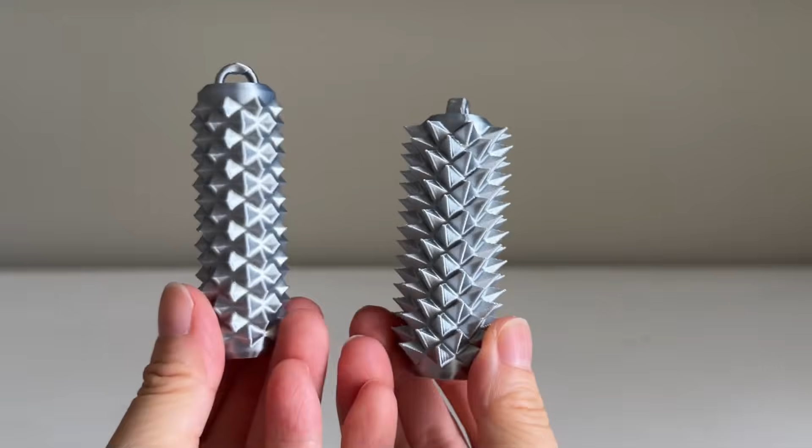At first glance, this might look like something you wouldn't want to touch, but for many people, spiky sensory toys are surprisingly satisfying to play with. Those little spikes create a unique tactile feeling that keeps your hands busy and can be surprisingly relaxing.

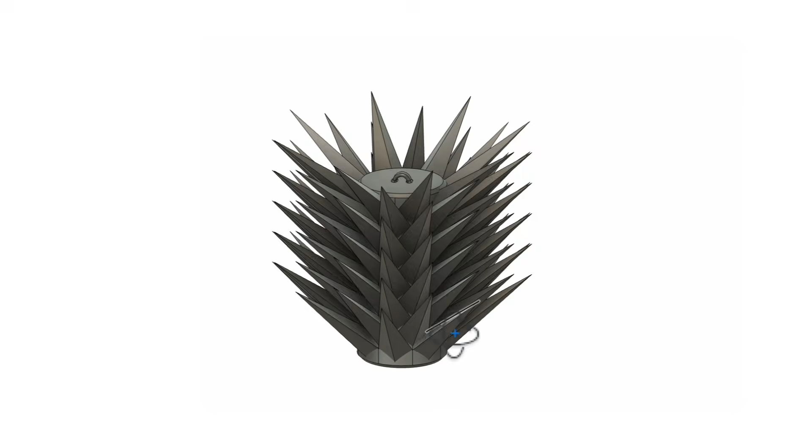It may look complicated, but in Fusion, you can build a spiky sensory toy like this in just a few simple steps and keep the whole thing parametric, including the spike feel. Change one value, and you can go from a low pain version to something much more intense. All right, let's dive right in.

First, let's take a look at the design. Let's start by defining a few key parameters, including the cylinder's diameter and height.

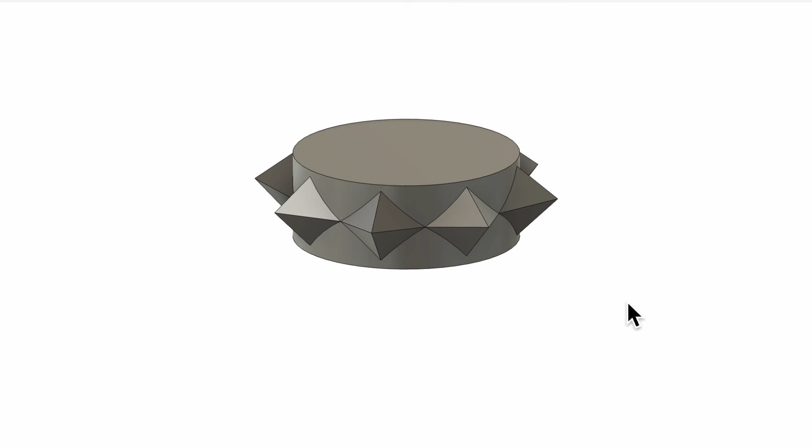You may have noticed that the spikes are arranged in multiple layers. Each layer contains one ring of spikes, and the distance between layers is called the layer height. The whole fidget is built by stacking multiple layers.

We'll start by entering the key dimensions into the parameter table. Think of it as your control panel for the whole model. This will make everything super easy to adjust later. Click the little plus icon to add our first parameter, diameter, and set it to 18 millimeters.

I'll skip ahead here instead of showing every entry one by one. We've defined diameter and height as the cylinder's overall dimensions. We also need a layer count. It's calculated with this formula, which assumes the spike width and height are roughly similar. Finally, we'll calculate the exact layer height by dividing the total height by the number of layers.

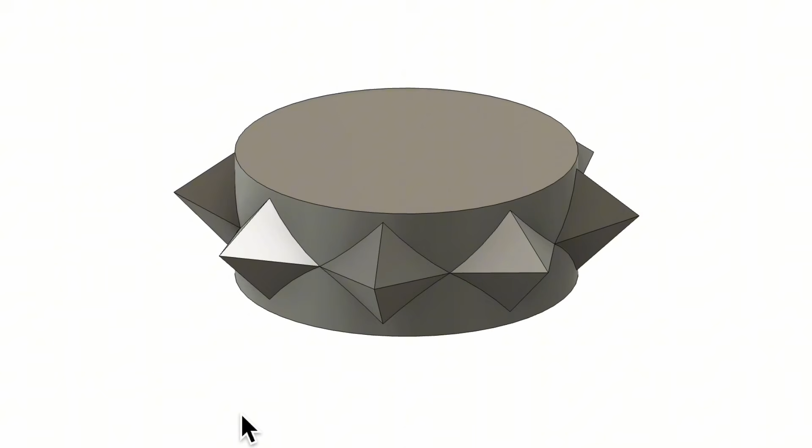Before moving on, let's take a closer look at one layer of spikes. Each layer has 8 spikes. Working directly on a curved surface would be tricky, so I'll build the spikes on an octagonal prism instead. On each side face, I'll create a small quadrilateral and loft it into a spike.

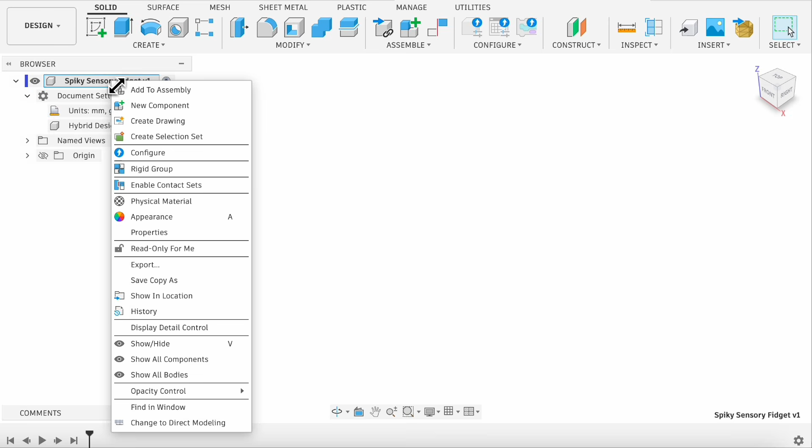All right, let's start modeling. Right-click the root component in the browser and select New Component. Let's name it Spiky Sensory Fidget. I'll start with a sketch on the XY plane.

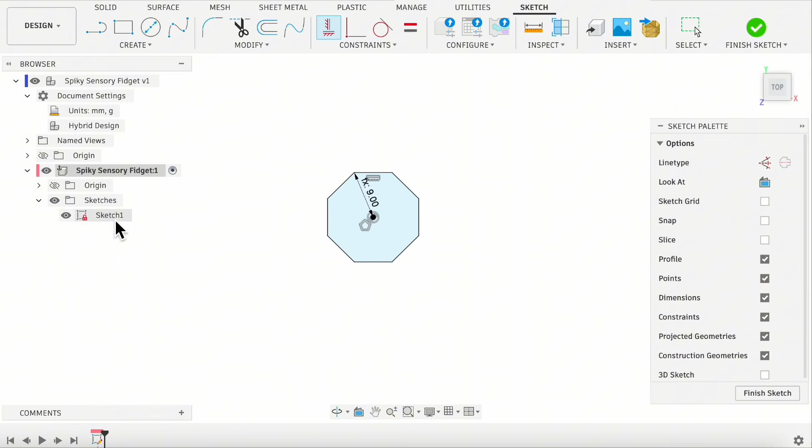Create an inscribed polygon with a radius equal to diameter divided by 2, and set the number of sides to 8. Check if it is fully defined here, the small lock icon. Finish the sketch and rename it to Octagon.

Hit E to extrude. Set the extrusion height to the layer height parameter. This is one unit layer. The full fidget is made up of multiple unit layers.

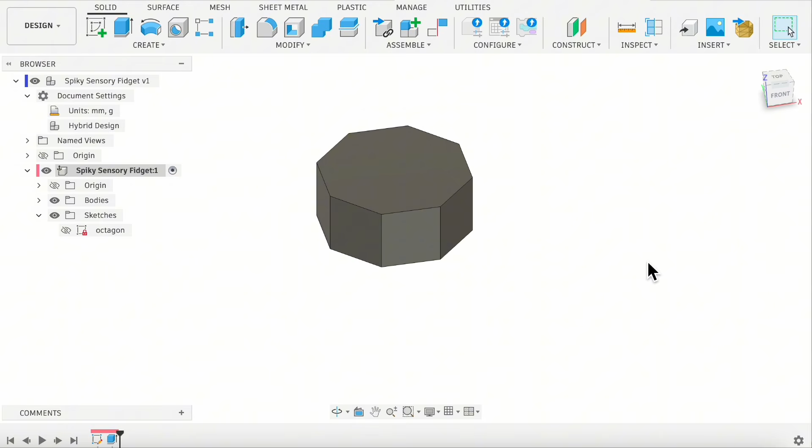Next, we'll model the first spike. Create a new sketch on the XZ plane. Press P to project this face into the sketch. Let's hide the bodies for now. Press L and draw the first spike profile.

From the side, it looks like a triangle. Since the print direction is along the Z axis, we'll set this angle to 45 degrees to avoid a steep overhang.

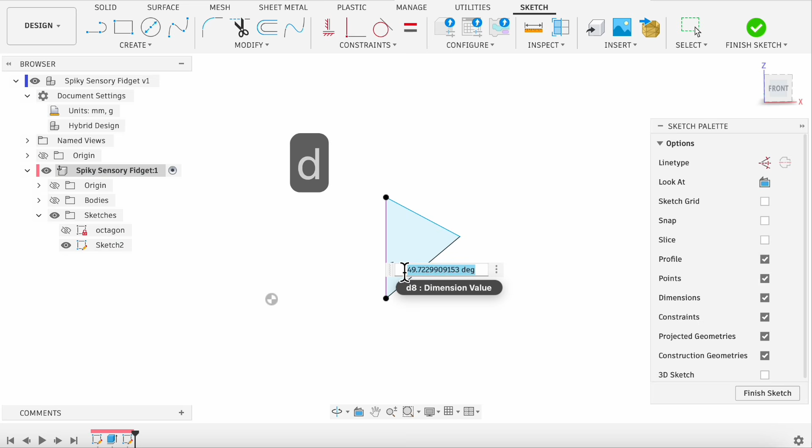Here's the interesting part. The spike height directly controls how this feels. To make that tactile feel parametric, go to the Modify menu and open Change Parameters. Add a new parameter called Spike Height. It controls the spike height and how intense the texture feels. For now, I'll set it to 4 millimeters.

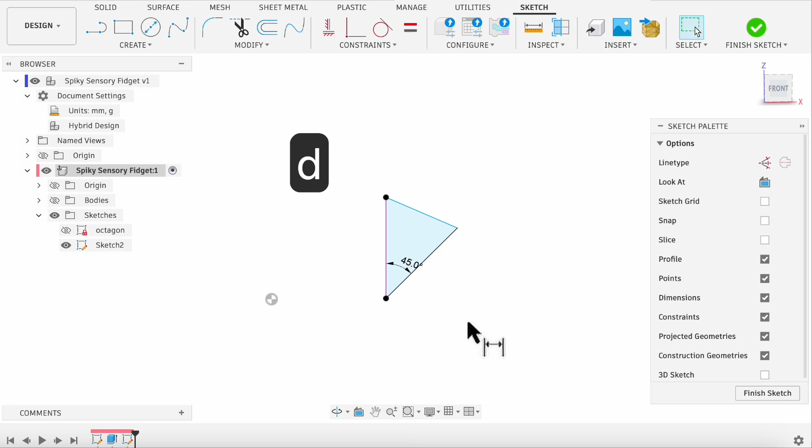Press D and set this height to the spike height parameter we just created. Now everything looks fully defined. Okay, let's finish the sketch and rename it Spike.

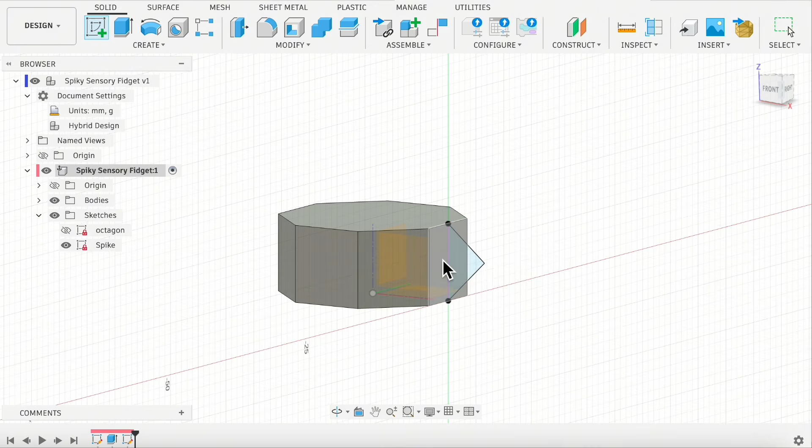Next, let's sketch the base of the spikes. This sketch is created on the side face of the prism, but it only covers part of the face. Create a new sketch on this face. Press L and connect these midpoints. Finish the sketch and rename it Spike Bottom.

Next, go to the Create menu and choose Loft. Loft the quadrilateral on the prism face to the point on the outside. That gives us our first spike.

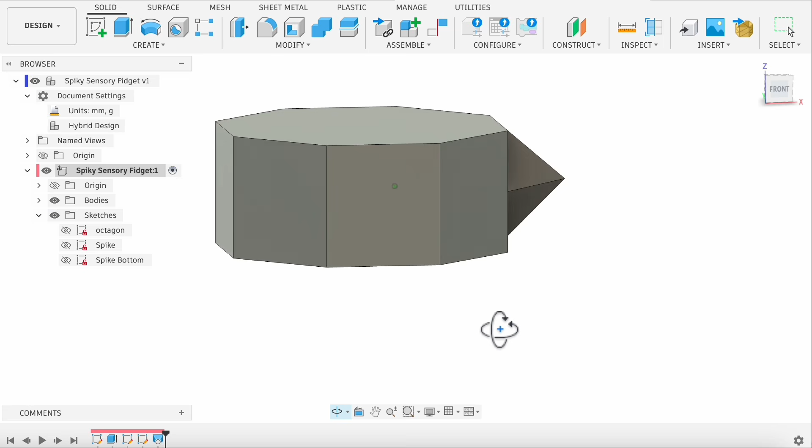Luckily, we don't have to create all 8 spikes one by one. We'll use circular pattern to create a full ring of spikes. For Object, choose Features, select the Loft feature from the timeline, and use the Z axis. Set the quantity to 8. And now we have the first layer of spikes.

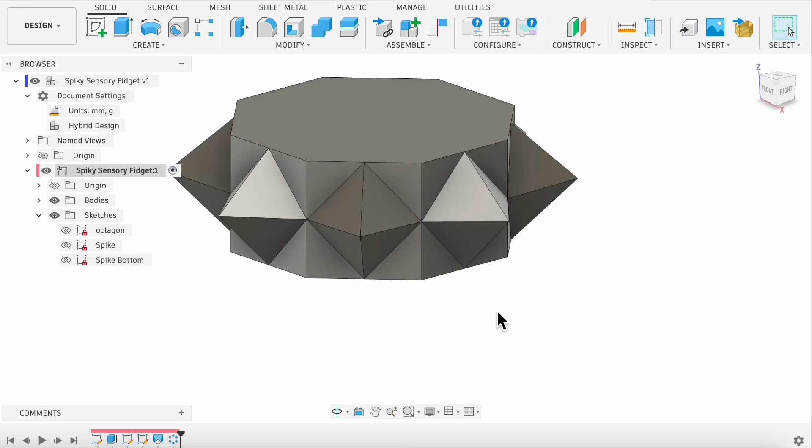Next, we'll create another layer. Since the spikes are staggered, we can't just copy this layer directly. I'll use rectangular pattern on this body. The direction is still the Z axis.

Set the distribution type to spacing. Set the quantity to 2. Set the distance to layer height divided by 2.

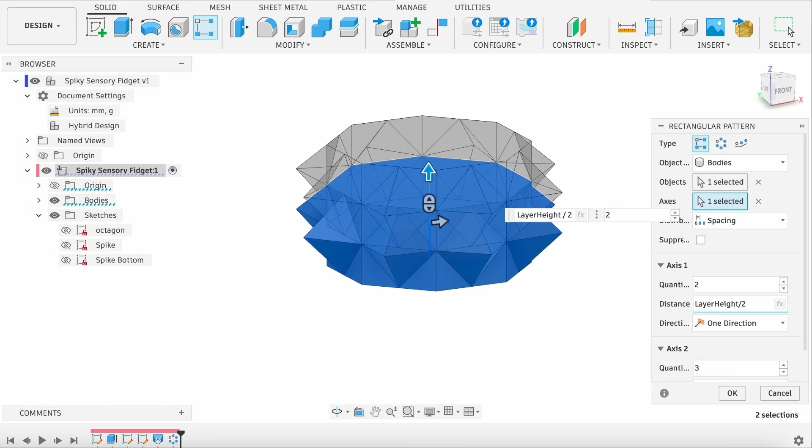Right now, the 2 layers are aligned. We need to rotate the upper layer so the spikes are staggered. Press M and rotate the upper layer around the Z axis. Set the angle to 360 divided by 8, then divided by 2.

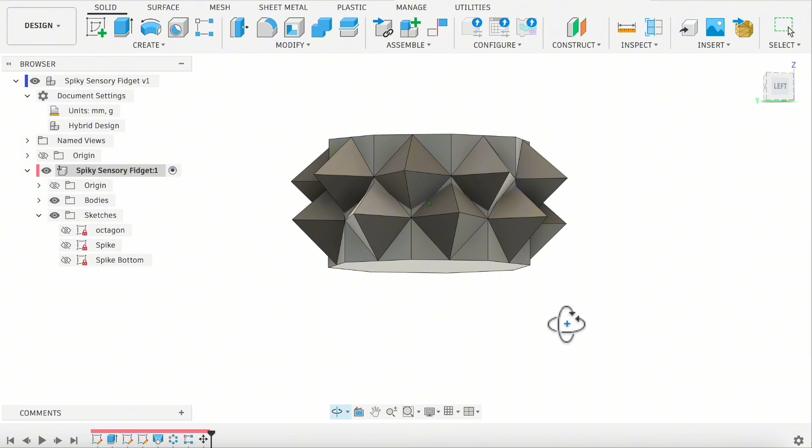Okay, that looks way better. If you look closely, the spike bases look a little strange here. That's expected. We're approximating a cylinder with an octagonal prism, and the 2 layers are rotated to create a staggered pattern. We'll fix this later.

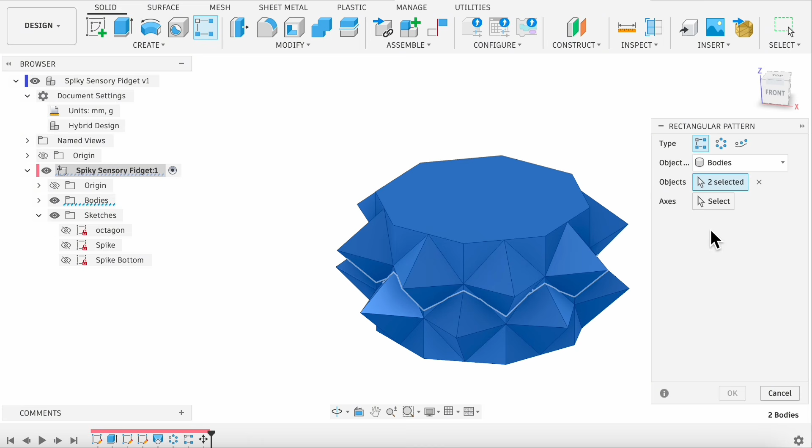With the first 2 layers done, we'll use rectangular pattern one more time. Copy these 2 bodies upward along the Z-axis. Keep the distribution type set to spacing. Set the distance to layer height, and set the quantity to layer count.

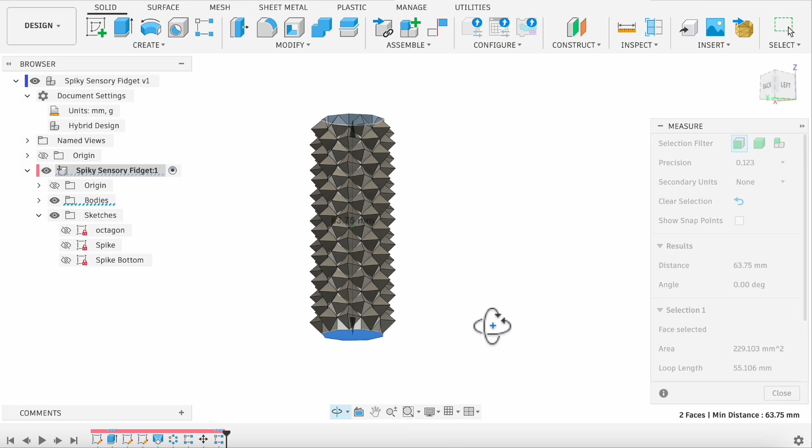Now it's starting to take shape. Let me check the height of the top and bottom surfaces. We've set the height parameter to 60, but the model is measuring 63.75. So let me open the parameter table and see what's going on.

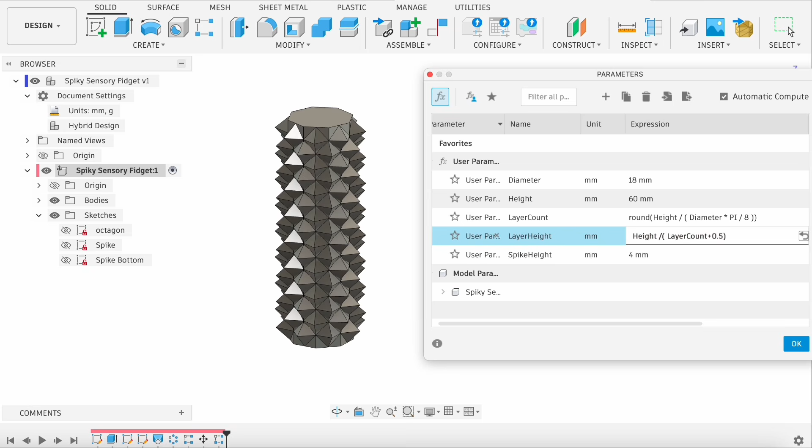It turns out the stagger between the layers is adding an extra half layer. The total number of layers should be the bottom half layer plus the layer count, so the layer height formula should be height divided by layer count plus 0.5. Let's check again. With the layer height parameter fixed, the model matches the 60mm height we defined.

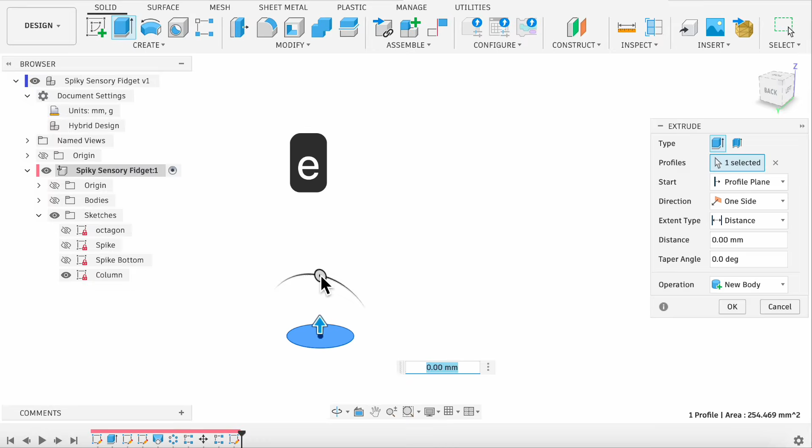At this point, the spikes are done, but we still have a few finishing touches. For example, I'll add another cylinder through the center, create a sketch on the XY plane, draw a circle, hit E to extrude. I'll make it slightly taller than the height parameter so we have enough room to add chamfers on both ends.

I used join here, but I actually recommend using new body instead. If you change the height parameter later, the join operation may fail because the number of bodies involved can change. The spike bases looked a little strange before, but adding the center cylinder makes them look much better.

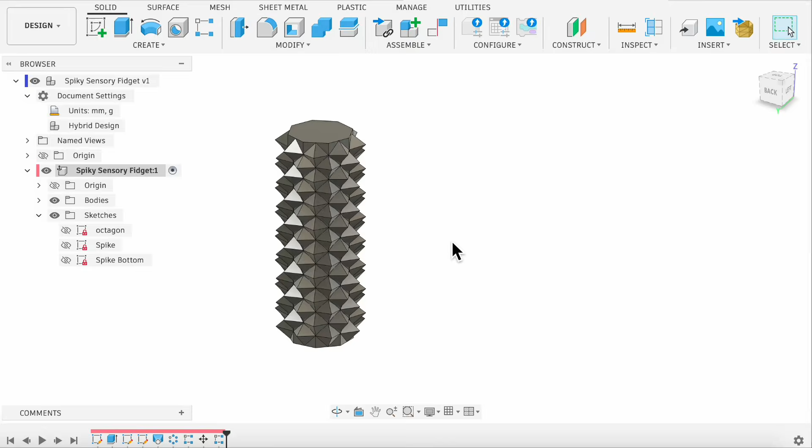Before we wrap up, there are still a few cleanup steps to finish. To make the model look more refined, I'll add a small chamfer to the top and bottom surfaces. This also helps reduce elephant foot during printing. If you want, you can also add a keychain loop at the top.

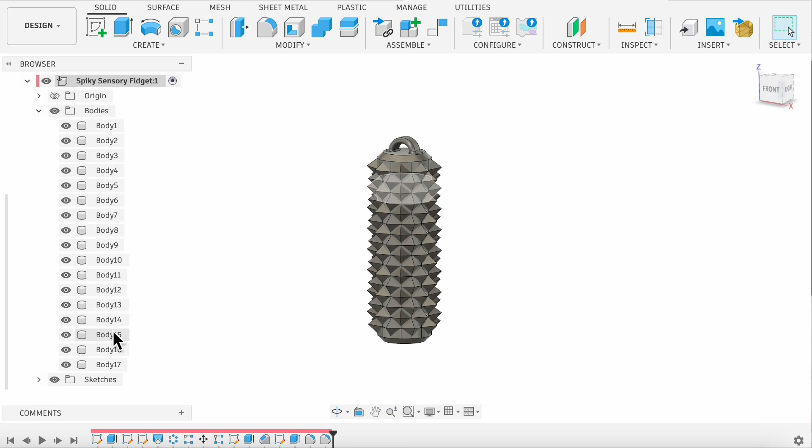You may also notice that we haven't merged all the separate bodies, but don't worry, this won't affect the print at all. Sending these independent bodies to your printer works perfectly fine, as long as you don't manually split them in the slicer.

Now, it's time to see the real magic of parametric modeling. Let's open the parameter table and play around with the values. From here, you can easily change the diameter and height. Everything scales perfectly without breaking a single feature.

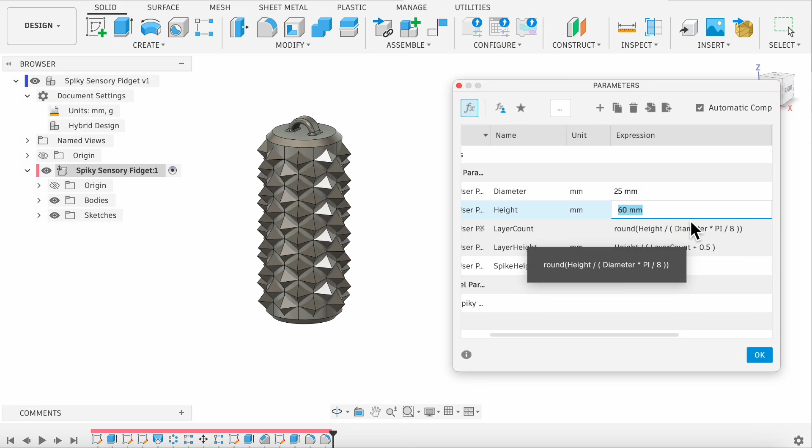You can also change spike height. The higher the value, the sharper and more intense it feels. Ouch, that looks painful.

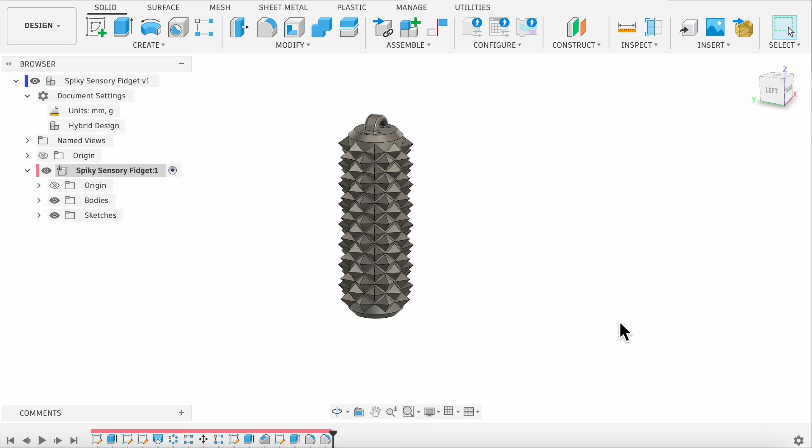Okay, send to print. Here's the final print. This is the low pain version. I think I can handle it.

And this is the high pain version. See how different they look? Yeah, I think I can feel phantom pain just looking at it. Oh, that really is painful, but somehow I can't stop playing with it. I could already feel the pain when I removed it from the build plate. The pain level is mainly controlled by the spike height, so you can dial in the level that suits you.

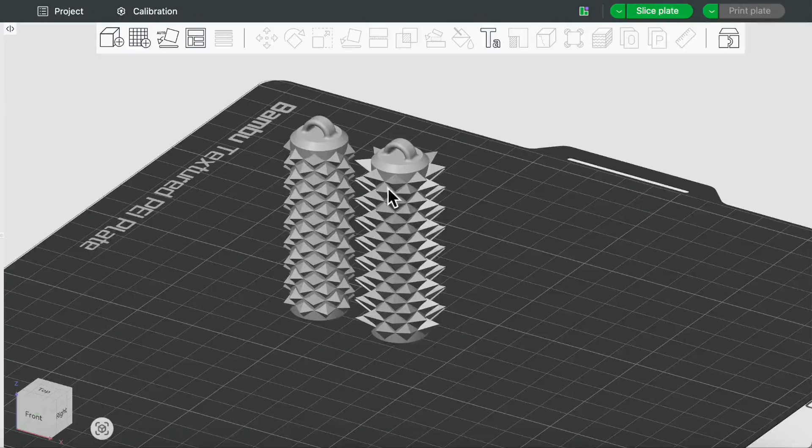To make it more fun, I decided to make a rotating version. Which one should I use? Let's go with the high level one. Create a new plate and copy the model over.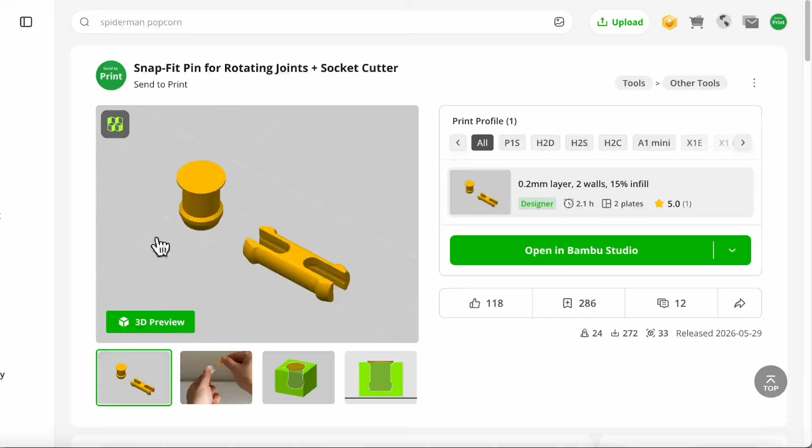First, split the fidget in half. I'll use the default split height. Next, download the rotating joint and socket cutter we created in an earlier video. Drag both of them into the slicer.

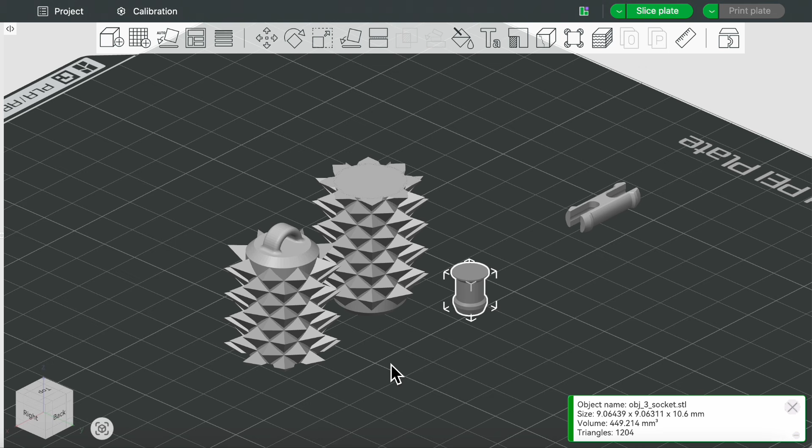First, split them into separate objects. The connector is lying on the build plate, so I'll move it off to the side and print it as is. Then use the socket cutter to cut matching holes into the 2 split faces. I'll move quickly here, but you can watch that earlier video for the full explanation.

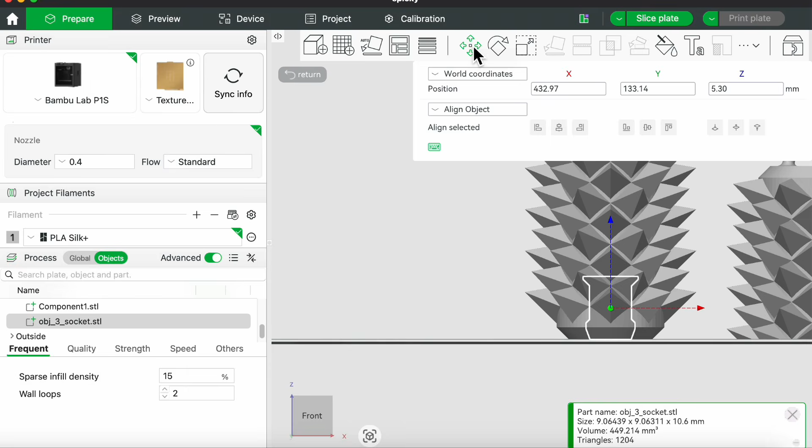Duplicate the socket cutter because both halves need a hole. Merge the socket cutter with half of the fidget, align it along the x-axis, then the y-axis. Select the socket cutter and move it along the z-axis until it's in the right position. About here. Okay. Run the Boolean operation and choose subtract. Let's take a look. Yes, the hole is right there.

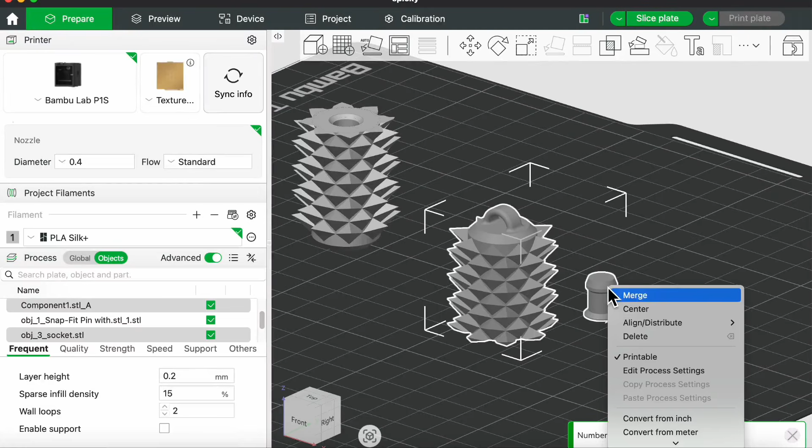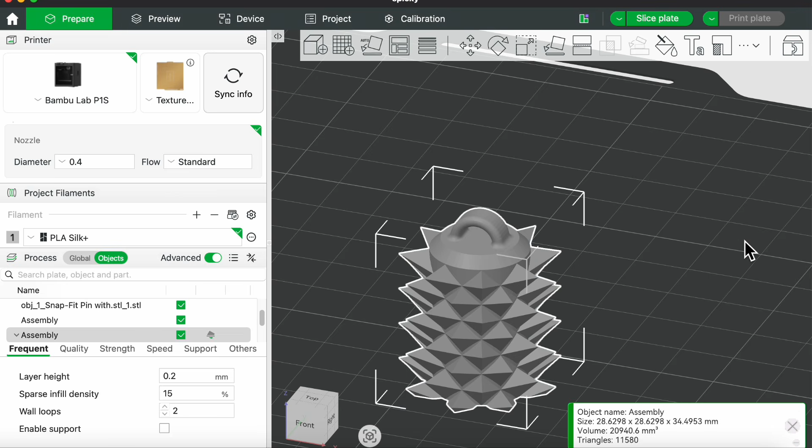The other side works the same way, just in the opposite direction. First, flip the socket cutter around. Then, merge it with the other half. Center align it. Move the socket cutter up or down until it's at the right height. Finally, run the Boolean subtract operation. As you can see, there's now a hole on the bottom of the other part too.

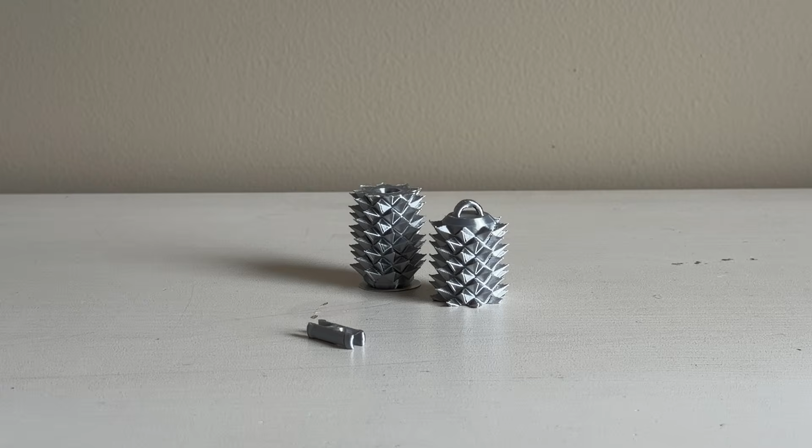All right, arrange the parts and slice them. Everything looks ready. Send to print. Remove the brim first. This is the connector. Insert it into the socket on one side, then push it into the other side.

This part can be a little painful, so it really tests your tolerance. Now the two halves can rotate. However, they don't spin as freely as they could because the two mating surfaces have quite a bit of friction. A little sanding should help.